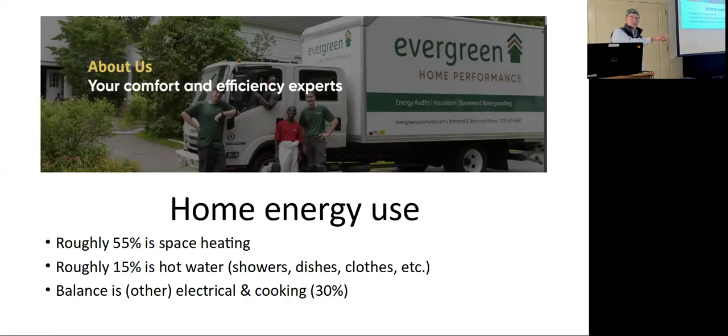15% roughly is hot water, and the balance is other electrical, cooking, other demands, plug demand, lighting, et cetera. Now, yes, some of us are now plugging in our vehicles to charge from home and so forth. But that's a little bit different in that we're just passing that energy through into the car. We're not actually using it inside the home.

So this is something that surprises many people, at least that's been my experience when I've presented this before. Many homes are wasting 90+% of their energy. We can easily reduce that in many cases by 75%. When you tell someone or they hear that I can reduce my energy use by 75%, minds are exploding. They're just not believing that it's possible because we've been taught to think about incremental change.

Jimmy Carter, for those of you old enough, and you all look old enough to remember him, right? It was put on a sweater and turn down the thermostat. Speed limit went from whatever it was before I was driving, down to 55, right? All of these things were ways that we could reduce waste. By going 55 instead of 70, we burn less gas per mile. We still get there. We pay for it a little bit more in time, but we save energy by doing it. So that was one way to reduce waste.

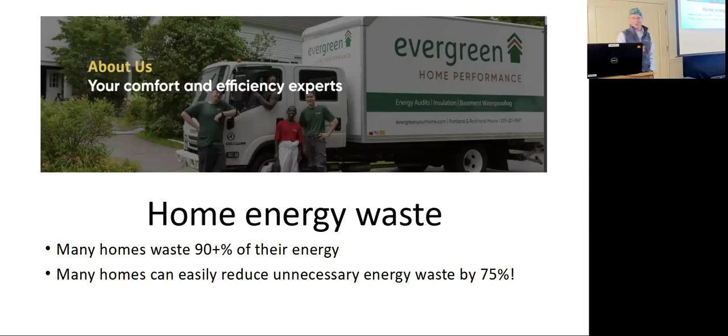Putting on your sweater, turning down the thermostat, same thing. That was reducing waste. Were you less comfortable? Maybe, depending on the quality of your sweater, I suspect. So, demand. What is it? What creates it? I'm going to encourage you to use 3 terms tonight, the first of which is demand. Demand is what you lost and what you need to replace. Can also be defined as unnecessary waste.

So if we think of heating, we're space heating. We want our space to be warm. We want the table to be warm when we put our arm on it. We want the couch to be warm when we sit on it. We want the air to be warm as we move around in our houses. If we had a perfect house, we'd heat it once in the beginning of the season and we'd be great for the entire season, right? If we didn't waste anything, we didn't lose anything. But that's not the case. So demand is waste. And the same with hot water.

How many times have you turned on the hot water in your house to wash your hands, but you never actually got hot water on your hands? Studies have been done. Something like 85% of the time, people turn the hot water tap on because that's what they want, but we're not patient enough to wait for it. So what happens? That hot water goes in the pipe and then it just sits there because it never actually reaches the faucet. So you didn't really ever use that warm water for the purpose for which you intended it. You just burned some dead dinosaurs, perhaps, to create the hot water that you didn't end up using. So that's unnecessary demand.

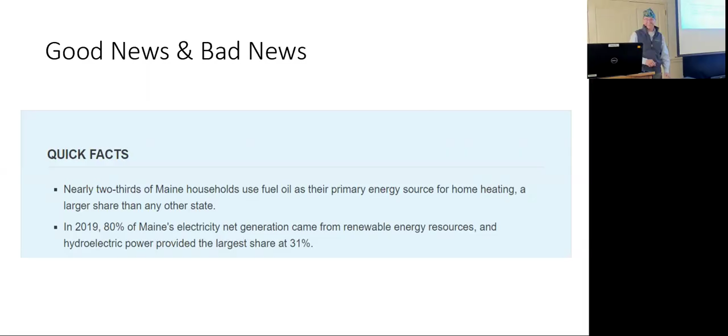There are some physicists who would say cold air falls, warm air doesn't rise. I think that's what you meant. I agree, but I'm trying to keep you all awake and alive. But lower density material rises. Exactly, and so when we warm air, the molecules are bouncing more, they get further spaced apart, and it rises.

So warm air tends to leak out of the top half of our house, and then it gets replaced by cold air that gets literally sucked in the lower half of our house. There's an area in the middle somewhere where theoretically, if you opened a window and there was no wind and you didn't have your dryer on, you didn't have your range hood on, you didn't have your bath fan on, no air would leak in or out.

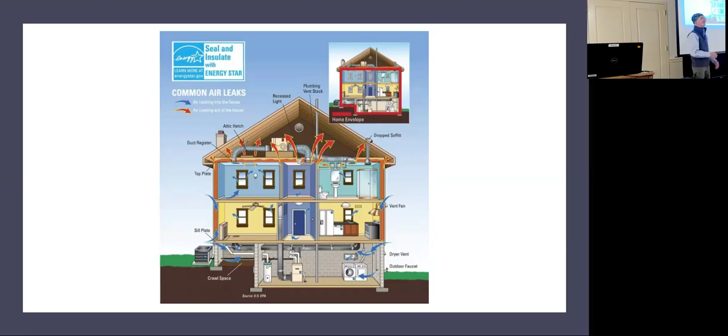So this is where, again, this thing can get in the way of progress. So the hardest thing to change is here. And you all, if you choose to become energy coaches, or if you just take the message to your friends and neighbors, you can help people get past this obstruction quite easily. This is not really all that good. I'm not gonna go there.

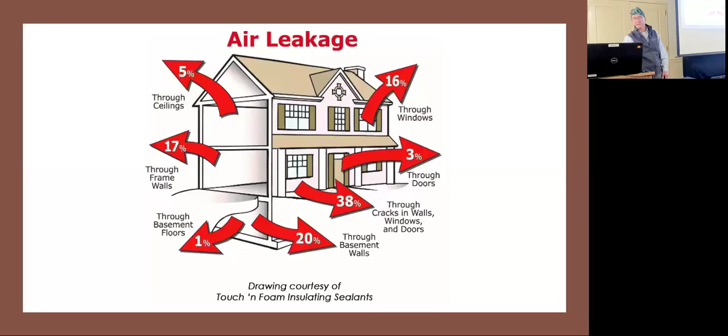So you can imagine every time there's a wire coming up, there's a vent pipe that allows you to flush your toilets, there's a chimney, there's an attic access hatch. Any number of these things, and there's hundreds of them. They're all leaking just a little bit. And they were never required to be air sealed when the house was built. So there's enormous opportunities, and that's just a smattering of them.

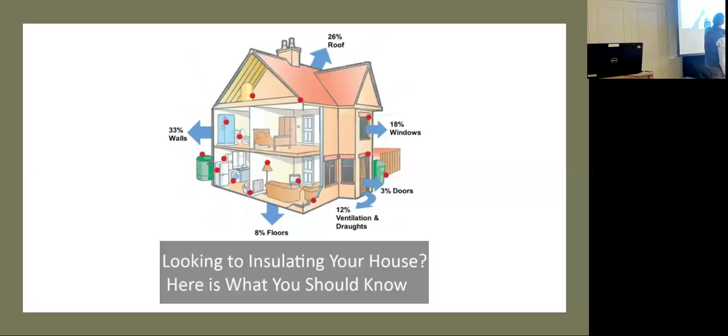So this is heat loss. To answer your point, this is about heat loss. Where are you losing the actual heat? 8% is going down, 12% is ventilation and drafts, 33% is going out your walls, 26% out your roof, 18% out your windows.

So it's pretty easy, relatively speaking, because we can access your attic. Anyone can. You can pull up the fiberglass, do some air sealing, and add more insulation. It's really hard to do the walls because that assembly is already built and there's something solid on each side of it. And it's harder to make it thicker because then you have to move all the windows and so forth. So even though there's a great opportunity there, they're harder to get to. Windows, yeah, they can make a difference for sure.

Floors are increasingly important because many people are switching to heat pumps. How many people have switched to heat pumps? Excellent. Did any of you have a central heating system in your basement before you made that switch? Okay, great. Did you notice once you switched to heat pumps that your first floor got a whole lot colder? Yeah, call it out. Yes. Did your heat pump installer tell you that? They probably told you that was going to happen, right?

No. It's not because they were mean or nasty or didn't like you. They didn't know. Because they didn't have the building science knowledge to understand what was going to happen when they changed one part of your home as an energy system and how that's going to affect the other.

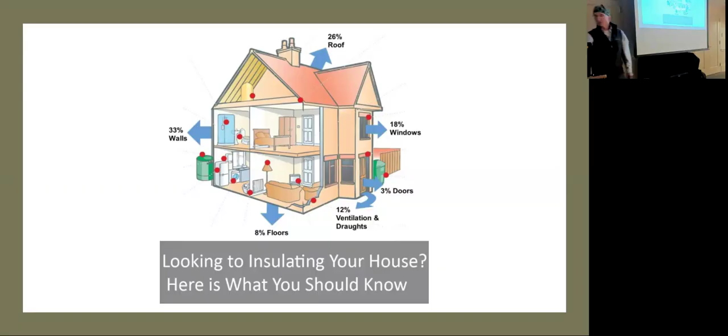Just want to point out that if you have a heat pump water heater down there, you're making the basement even colder. Correct, absolutely. And so, yeah, there's a lot of nuance.

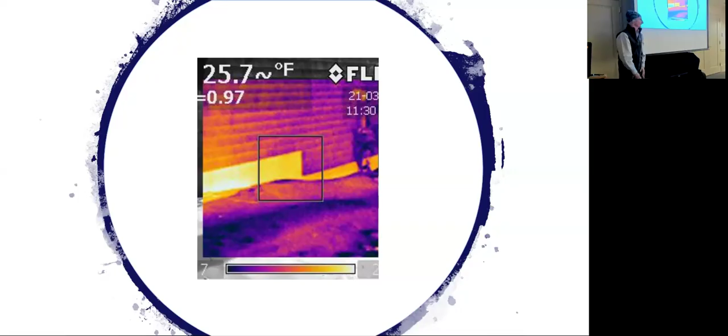But long story short, if we think seriously and work hard to reduce demand, then we've got a much smaller supply problem, and then we've got a smaller source. Meaning we need fewer solar panels on our roof, or we need a smaller share in the solar farm, or what have you. Does that make sense?

Mm-hmm. Is there anything that you learned tonight that you didn't know before? Just raise your hand if there's something you learned.

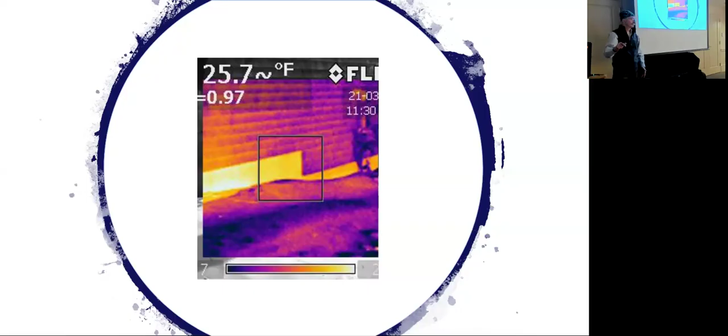All right, pretty sharp crowd here.

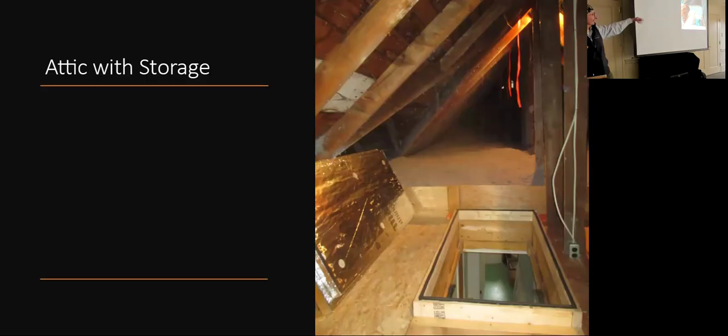Okay, so some of the ways that it can be done: this is insulation in the basement on the wall. It can be very pretty. This is rigid foam. It works well on poured foundations, and attics. We add lots of loose, fluffy stuff. This is a pull-down attic staircase, and there's some storage space that many of us want to have. And then a lot of big piles of fluffy stuff there above the ceiling.

This is distribution. So if you have a hot air system of any kind, whether it's heat pumps or other, insulating to keep that heat and direct it where you want it to go is important. Some people have heat pumps in their basement or a furnace. And again, not letting it heat that basement. You don't need the basement warm. So make sure you get that all the way up into your living space.

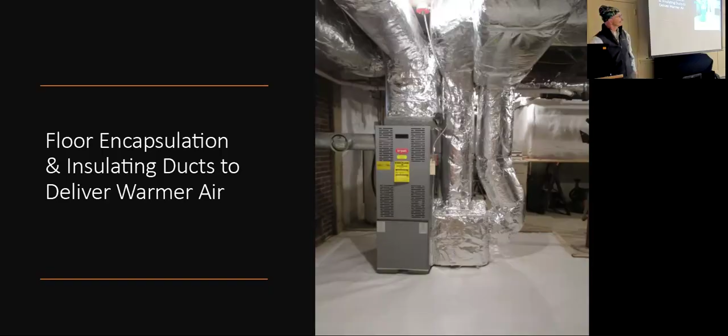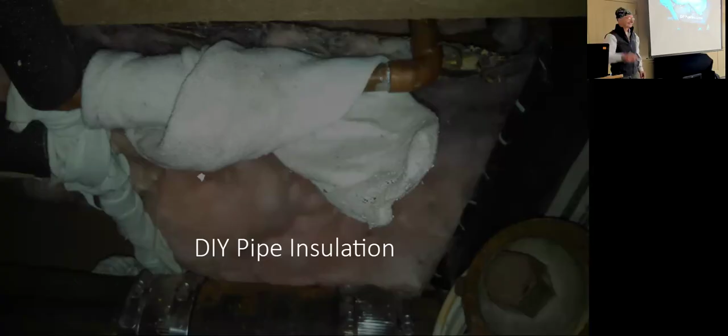And I love to end with this one. Can anyone tell me what they think that is on there? Someone said it. Diaper. It's a sweat sock. Yeah. So believe me, there is nothing that you have in your house that we haven't seen before. I mean, think about that. Someone's like, "Oh, I think the pipe's hot, I'll keep it insulated." So, did that work? Sure. Was it perfect? No. Was it a step in the right direction?

Absolutely. And the most important thing that we can do is take that first step, or convince, cajole, encourage, praise those others that do the same thing. Because once you've taken that first step, you're much, much more likely to take the second and the third step.

So I'd encourage you to talk to your friends and neighbors, share the message of the home as an energy system and how it can work better for you and for our planet. And quite frankly, it's better for the economy of the state of Maine. Because again, we're not making any oil or propane here. It's all imported. Thank you.

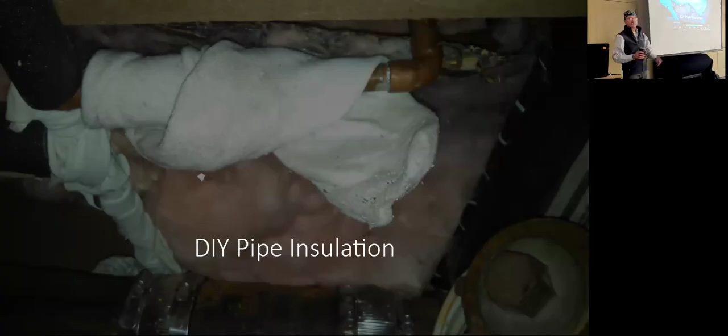Are there questions for Brian? Well, I want to make sure there's time for the window thing, but did you say at the beginning that 75% is savable? Yep. Conservable, yeah. When you conceive of, say, the house that I purchased in 2006, it was almost entirely fueled by oil. My hot water and my heating was all oil.

And I started by insulating, then I added solar to heat my hot water. I added tubes on the roof that heated a big tank in my basement. So I stopped heating my water that way. And then I insulated and air sealed the heck out of it. And I reduced my building's energy demand by 50%. And I didn't even switch out the heating system.

If I had switched to a more efficient heating system like heat pumps, then I probably could have cut that 50% by 50%, which would have been that last 25%. I would have reduced my energy use by 75%. I'm old school. I grew up in Vermont. I'm a woodchuck, so I burn wood.

Yes. Is there any real value to just switching out an old oil furnace to a newer, higher tech one? Yes, so you can get more efficient. Most oil burning devices are around 80 to 85% efficient, meaning only 15% of the heat goes out the chimney. But then you've got distribution losses. So whatever pipes or ducts are going in, you may lose another 25% that way and so forth.

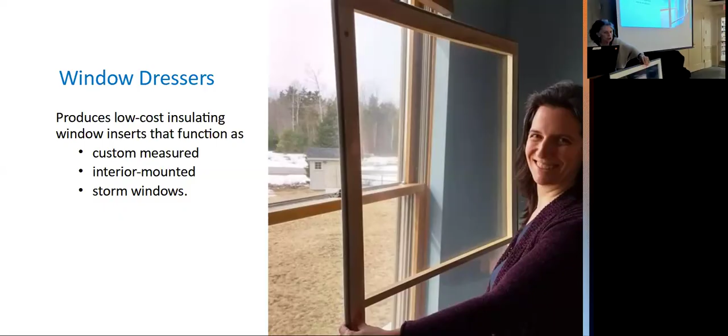So here's another example of the sizes. We've done very small ones, and when we do those, everyone thinks they're so cute. Last year we did 20 little tiny ones for a church, and some of them are huge, and it really requires two people to manage them. So it's quite a variety of size that we see.

So WindowDressers is a nonprofit organization. Oops, very sensitive. Dedicated to building these custom insulating window inserts. We use volunteer power. We do have six paid administrative people. Now that we've gotten to serve almost Vermont, New Hampshire, and Maine, we need some more administration.

Now this is just, maybe it's on a timer somehow. Oh dear. I've got to talk fast. Go back to the earlier. Yeah. I think maybe only that one is on a timer for some reason. Okay. So we started... We'll stop it.

It started right here in Rockland. Dick Cadogan's church did an energy audit and found that the 20 big windows in the vestibule were leaking a tremendous amount of energy. And he went to a workshop, Damariscotta, they were doing this. So he went to this workshop and came back and built these first 20 inserts for his church in his basement. He's not a mechanical engineer, but he's a great woodworker, so he had all the tools he needed. He measured them all by hand and built them all.

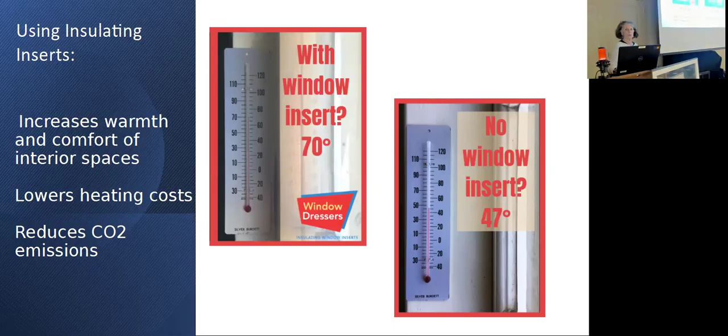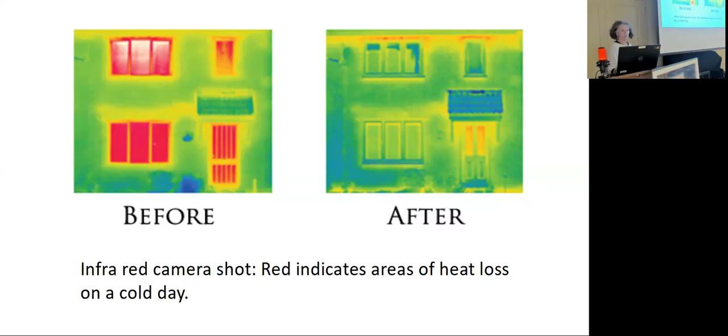WindowDressers started in 2010. So in the last 15 years, over 44,000 tons of CO2 have been saved. And this is about the same as taking over 9,000 cars off the road. So I think that's an interesting way of thinking about it.

And here's a bunch of data, which basically is showing each year how much CO2 has been saved, how much has been saved financially. Is that statewide? This is throughout all the WindowDressers, all 3 states. Yeah. Okay.

So this statistic is from counting 2024. Volunteers will have built over 78,000 custom-made insulating inserts, which is a lot of windows, really a lot. And the statistic is that between 25 and 35% are to low-income families for little or no cost, but actually for the Rockland build, it's closer to 40%.

So the goal is that financial situation is not a reason not to get inserts. And we really are committed to increasing the funding that we have available for everyone to have access to them. With the measurers that go out, do you have this discussion with people about what the cost will be?

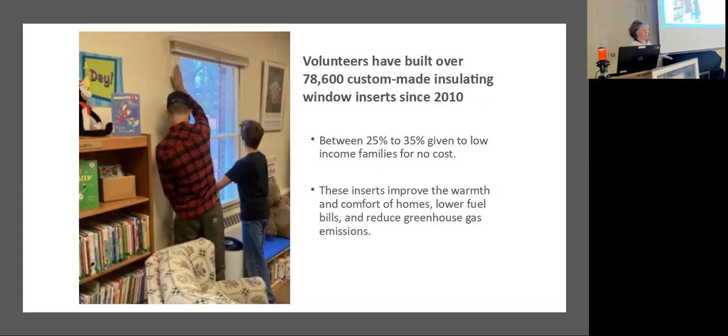And once somebody comes for 1 or 2 sessions, they get skillful in the different steps, and then they can really contribute by teaching. Everyone feels great when they can contribute, and I think that's something that can be brought out, that if you volunteer for several sessions, you can contribute extra by being a teacher. So that's really helpful. And that's a great question.

So signing up for inserts is going to WindowDressers.org. This is what the homepage looks like. Just go to inserts at the top there, and it'll take you through the process of organizing how many inserts you want. Usually people look around their house and say, oh boy, I could use 20 inserts. Then you start thinking about the price and how many you really want to pay for in a certain year. And when the measurers come out, they will help each family decide the right amount of inserts and which ones might be a priority for the first year if they don't want to do all of them.

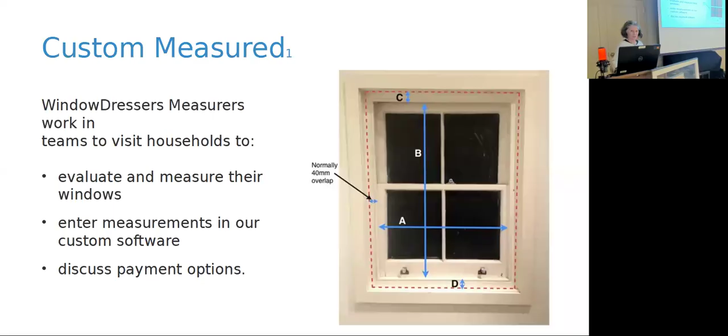And so this is the process. They're custom measured using a laser measuring tool. The measurers go out in teams of 2, and they measure each twice. This is what everyone knows in carpentry. What do you do after your first measure? Measure again. And here is the entering into the computer.

So this is the payment fee schedule, or I should say this year's. For us, our build has already happened, so I feel like it's last year, but this is this year's payment schedule. You can have them either in white or pine, and the white is sort of a, what do you call it?

It's a primer, more like a primer coat. So when people have beautiful white woodwork in their house, it's not going to match that shiny white. It will be whiter than pine, but just for people to know that it's more like a primer. I mean, it's definitely white, but it scuffs easily, and we'd have to do a lot of touch up.

So I just think that it's important for people who are talking about this with people to know that, and I don't mean to particularly downplay it, but just the fact that it's not, you know, the way you paint woodwork. It's really just a white. To me, it looks like a primer coat.

So you can see that if you order, you know, 10 large windows, that's $600. It's a hefty sum. So if you had more than that, and some of you I know here have ordered more windows than that, it can be a lot.

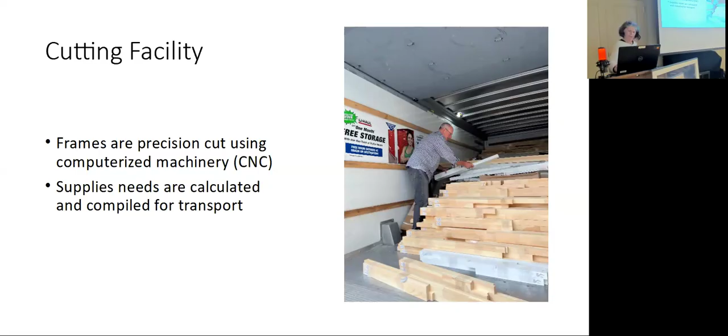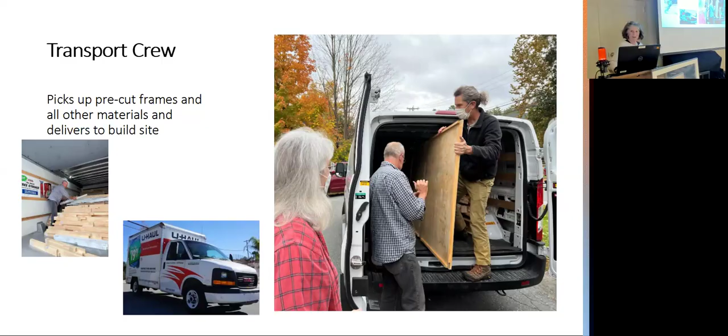And then they are wrapped. Each window insert, the 4 wooden pieces, are wrapped and labeled, and each window has the person's name on it and the dimensions of that window, so that in case they do get messed up, they can be put back together. And then they're transported with a U-Haul to the build facility.

A lot of the builds are, like I said, a little shorter, 5 to 7 days. Ours here have usually been closer to 2 weeks. We schedule them for 2 weeks, and oftentimes we get going faster than we think, and they get done a little bit sooner. But we schedule them for 10 days to 2 weeks. Right now we've been at the American Legion Hall in Camden. It's been a great facility, and they really have been very generous in donating their space.

So each volunteer is taught 1 or maybe 2 steps of the process. And each of the jobs has what we call a jig, which has been developed over the years to make the process smoother and also to systematize the quality of the outcome.

Not sure why this is happening, but the shift supervisors are myself and one other person. Then we have a crew of people that have come to a number of builds and have gotten training, and they are sort of the shift assistants that people can ask questions and will help do the teaching. And then we have the volunteers.

As I was mentioning before, a lot of times volunteers that come to do their windows come to 1 or 2 or 3 shifts, and pretty soon they're really able to do the training. And that's so helpful. Once the build gets going, people start coming back, and getting things started is a lot easier because you have people at each site that already know how to do it, and they can train people. At the very beginning, Chris and I are running around trying to train all 7 stations.

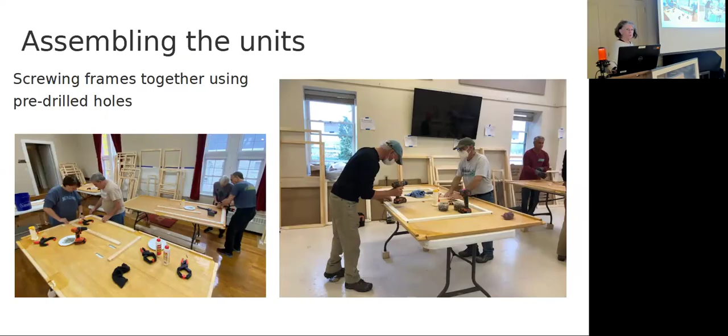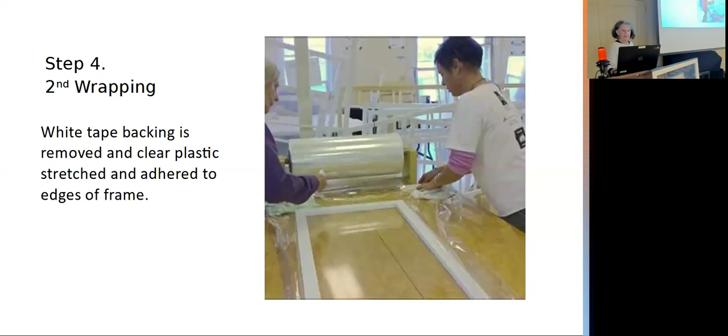And then this is assembling the wooden frames. They're glued and screwed together. Then white tape is put on, adhesive-backed 2-sided tape. Then the plastic wrap is put on one side, more tape is put on. The backing is taken off, and then the second side is put on. Then the whole thing is shrink wrapped so that the wrinkles come out, and also it becomes more clear looking through it.

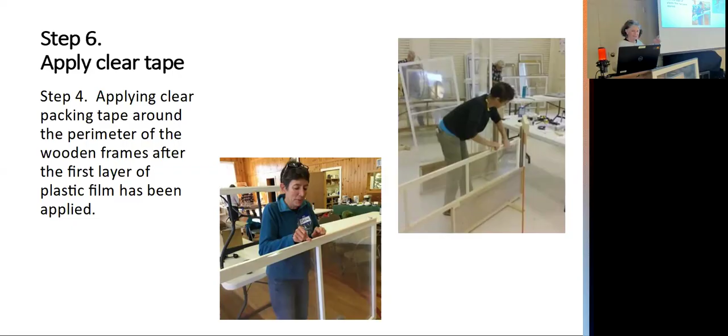So that's the part you do with the dryer, right? Right, yeah, but now it's really fancy because we have the heat gun. It's like a hairdryer, but a fancy one, in a device, and you just slide it underneath it. It used to be like a hairdryer, yeah. And then clear tape envelops the plastic, and then finally the foam is put on.

Okay, so the volunteers usually sign up for the 4-hour shifts. In our build that's usually 8:30 to 12:30 and 1 to 5. Depending on how many inserts you have, we hope that you'll sign up for 1 shift per 3 to 5 inserts that the person has ordered. We serve lunch. We look for volunteers to make lunch, but somehow, if we don't get volunteers, we get it from somewhere. But there's always lunch.

And so the final thing is signing up on signup.com, which is what we use to organize the volunteers for the builds.

Okay. I can attest that Connie runs a very good build. She is very, very